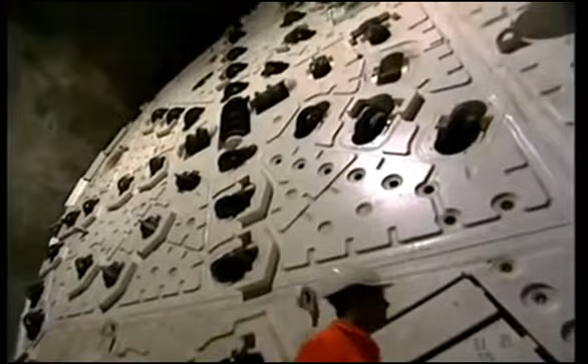It will take the largest drilling machines on this planet, each more than 3 stories high and longer than 4 football fields, drilling 24 hours a day for 6 years to get the job done. The project is incredibly dangerous and outrageously expensive. The price tag, $7 billion.

Can it be done? Or will unforeseen problems bankrupt the project before it's finished? Will engineers be able to avoid the horrible fate of so many other tunnels? Fire, disaster, and death.

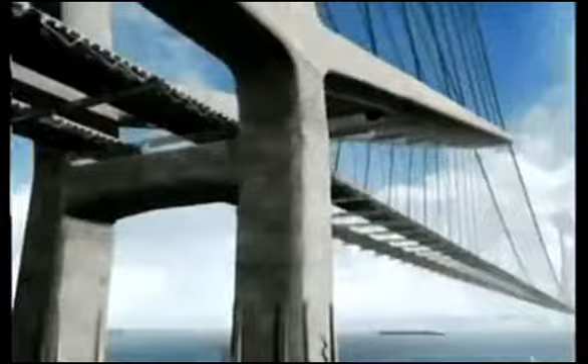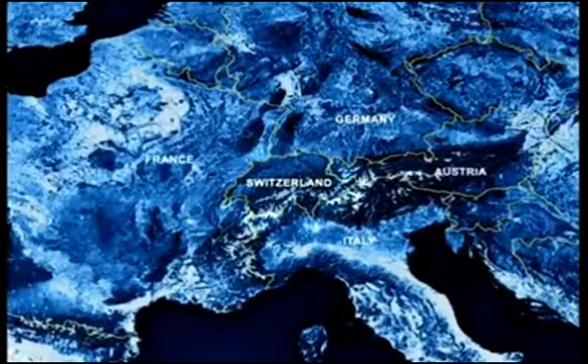To the outside world, Switzerland is a picture postcard. But the reality is not so pretty. Because of Switzerland's central location, each year 14 million trucks and cars coming from every corner of Europe pass through Switzerland on their way elsewhere. The sheer volume is fast turning this country into the biggest traffic jam in the world.

An obvious solution: put more freight and passengers onto trains to reduce the number of trucks and cars on the road. But it isn't that simple. The antiquated railway system is already jammed to capacity.

In 1998, Swiss voters decided that something had to be done. So they voted to authorize a whopping $21 billion for a mammoth project: a high-speed rail network to be built under the Alps, connecting Switzerland to the major cities of Europe.

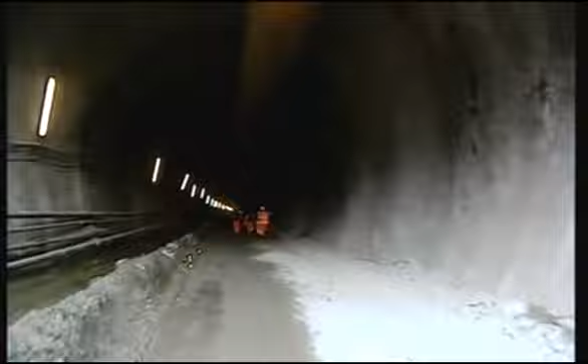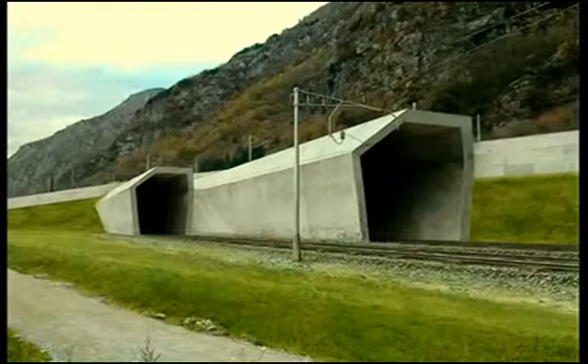The scale of the proposed project was staggering. It would require 2 separate tunnels, each one far longer than any mountain tunnel ever built. The shorter of the tunnels, named Lötschberg, would run for 21 miles under the mountains in southwest Switzerland. 50 miles to the east, an even longer tunnel would run 35 miles through the Alps. Since it would run directly under a mountain range named Gotthard, it would be called the Gotthard Tunnel.

3 times longer than any other mountain tunnel in the world, the Gotthard Tunnel alone will cost $7 billion. Enough to have built the Golden Gate Bridge 17 times.

The tunnel's path will be straight and flat, right through the base of the mountain range. This route will let freight trains race through the mountain at 100 miles per hour, more than double their current speed. And passenger trains will go even faster, up to 155 miles per hour.

Swiss voters were sold on the benefits of the proposed project, but they were also worried. They insisted that designers come up with plans to minimize the project's potentially devastating environmental impact. So the contract approved by the voters put enormous pressure on the engineers and the contractors.

First, there was the guarantee. The engineers would need to certify that the tunnel would last at least 100 years. That meant that literally every material used in the tunnel would need to be subjected to the most rigorous testing in history. But that wasn't all.

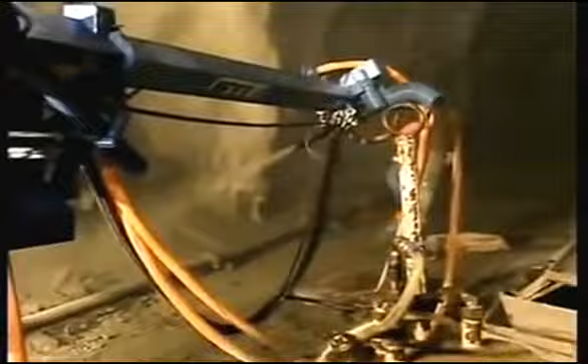The contract also called for the tunnel to be built fast. And if the builders made mistakes that put the project behind schedule or over budget, they would risk paying stiff financial penalties.

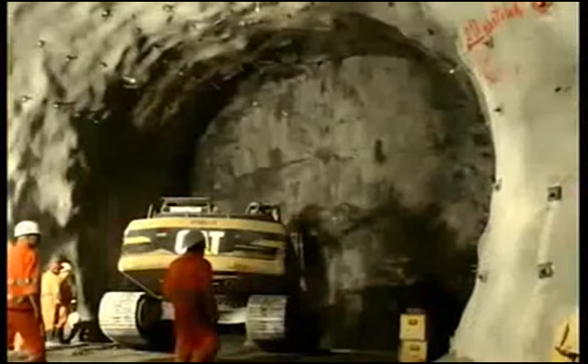We're not allowed to forget cost and time scheduling. Those are very risky things. And you just got to keep all of that in control. And everybody's just really aware the whole world is watching us, and we've got to get everything right.

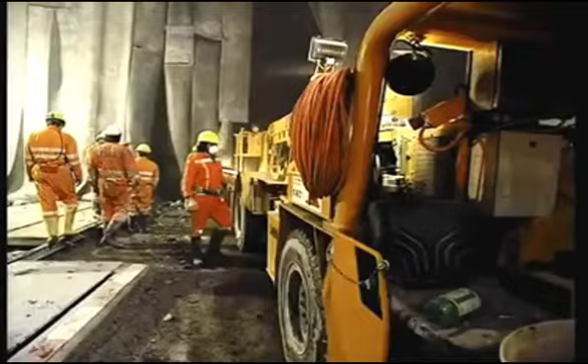Even without these added pressures, the Gotthard Tunnel project would still seem like an impossible task, just from the scale of the work itself. The miners will have to dig 24 million tons of rock out of the Alps, an amount that would fill over 16 football stadiums.

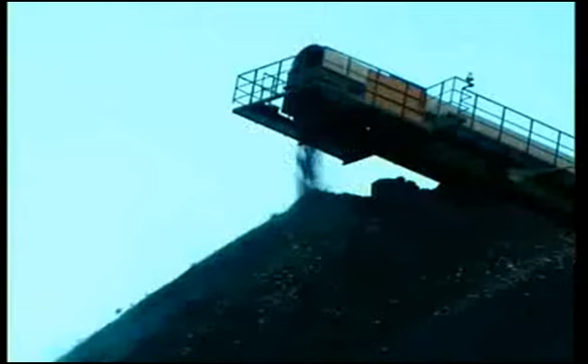Working conditions are extreme. Because the tunnel lies so deep underground, temperatures inside can reach 115 degrees. The miners work in near darkness and breathe thin, dusty air. Every day, they put their lives on the line.

The biggest danger is a lack of oxygen. In case of emergency, fire, explosion, the first thing that goes is the oxygen to breathe, because we're underground. We've got dumpers, we've got excavation machinery that move back and forwards. They're just moving around all the time.

It's dark. Drivers don't see people walking around behind. If they reverse out, somebody could get hit by machinery.

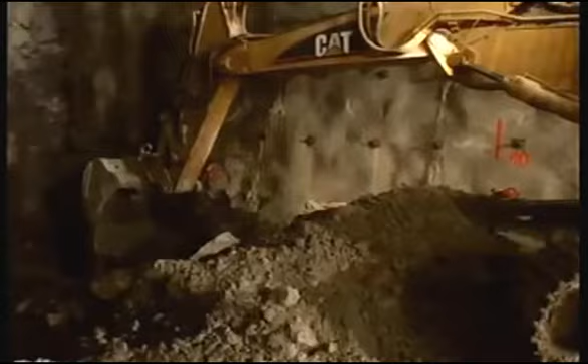And the dangers don't stop there. Tunneling, after all, is a battle between man and the Earth itself. Cave-ins are a constant threat. To minimize the risk, geologists take samples deep inside the mountain before any drilling begins, to find out what kind of rock the drillers might encounter.

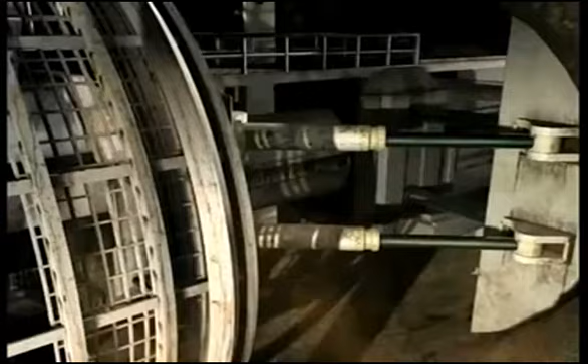A lot of sections we have rocks like this, real hard, nice granites, where we go through by a tunnel boring machine. The tunnel boring machine, or TBM, designed for the Gotthard Tunnel, can chew away at hard rock.

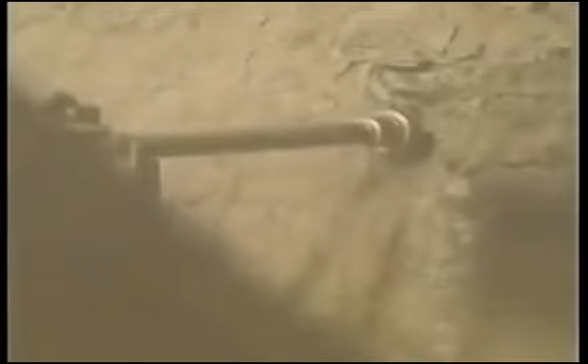But if the miners encounter soft or unstable areas, they have to use a different method. The rock must be drilled and then blasted out.

And in areas where there are high-pressure water zones and crumbly rock, none of these methods can be used, and the danger increases exponentially.

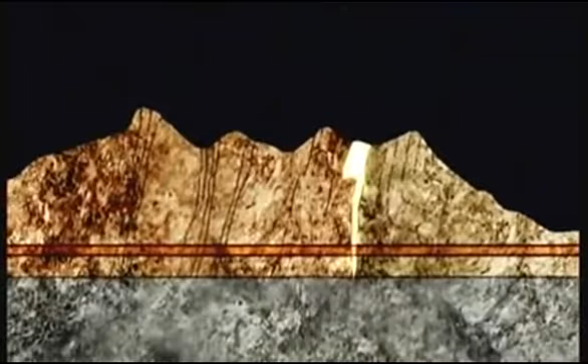In 1996, during the initial surveys, geologists discovered such an area sitting near the path of the proposed tunnel. The geological team taking core samples got hit by a sudden, powerful explosion of sand and water.

It's like you're in a submarine, 3,000 feet under sea level, and you drill outside into the sea. You hope that the water doesn't come into the submarine. So it's really life dangerous.

Fortunately, no one was killed in the accident. But the incident threatened to stop the project in its tracks. The engineers estimated that stabilizing the area would cost an extra $600 million.

That money simply wasn't in the budget. It took another half year of drilling deeper down before the geologists found a route that avoided the danger zone.

And then we found a totally different rock. We found a marble. So this is not a difficult rock, so we can go through by TBM.

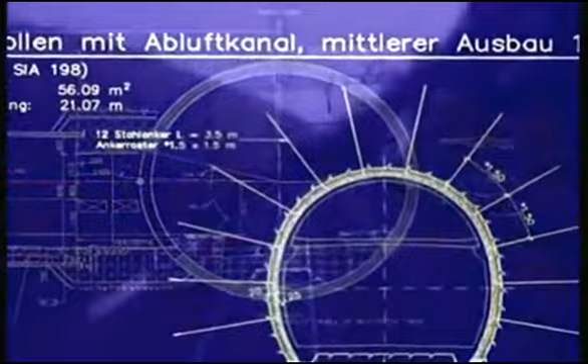Now that a safe path through the mountain had been determined, the design team could move on to their next big decision: what would the tunnels themselves look like? A single large tunnel with 2 sets of tracks inside would be the cheapest solution.

But this design had a fatal flaw. If a train derailed inside the tunnel, it could hit an oncoming train or block the tunnel in both directions.

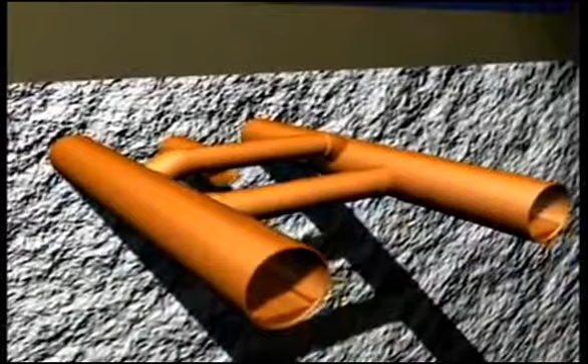A safer alternative would be the 3-tube system, like the one used in the Channel Tunnel between France and England. The Channel has 2 single tunnels, one for each direction, and a smaller central tunnel for emergencies.

That third tunnel proved a lifesaver on November 18, 1996. That evening, a train carrying several trucks entered the tunnel on the French side. The conductor was unaware that one of the trucks had somehow caught fire.

At the time, there were 6 trains in the tunnel, including 2 passenger trains. 12 miles inside, the conductor brought the burning train to a dead stop. He tried to get the passengers out, but the smoke was so thick they could barely see the exits.

Eventually, they were able to make their way to the safety of the central emergency tunnel. They were very lucky. The fire was so intense in the tunnel they had left, it melted part of the concrete lining.

2 people suffered serious smoke inhalation. But thanks to that central emergency tunnel, nobody died.

The lesson was clear: tunnels will always be dangerous places. But a good design can reduce the risks.

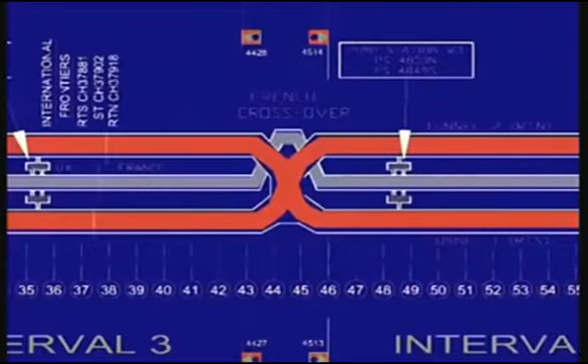The Swiss engineers carefully considered the pros and cons of each design. The single-tube system was clearly too dangerous. But the 3-tube system was far too expensive.

So they came up with something else: a double-tube design. Separate tunnels going north and south that would reduce the risk of a head-on collision.

To enhance safety, they added passageways every 1,000 feet. These would allow emergency crews to move between both tubes. 2 crossover points along the track would allow trains to switch from one tunnel to the other in an emergency.

The designers added another crucial feature: a series of small passageways connected to an escape route that crosses over to the other side. Each tube would have 2 of these emergency stations.

If a fire were ever detected, the computers in the command center would guide trains directly to the closest emergency station. Passengers would then evacuate the train and make their way to safety. A pair of massive ventilators at the portals would bring in fresh air and push out the smoke.

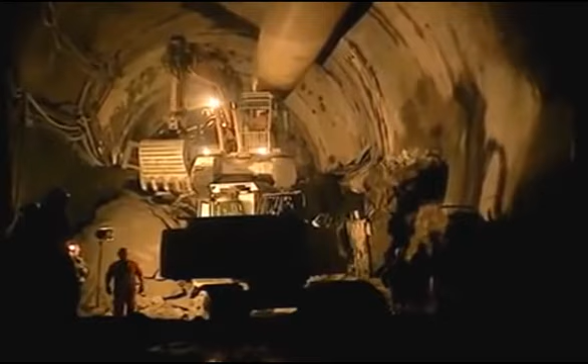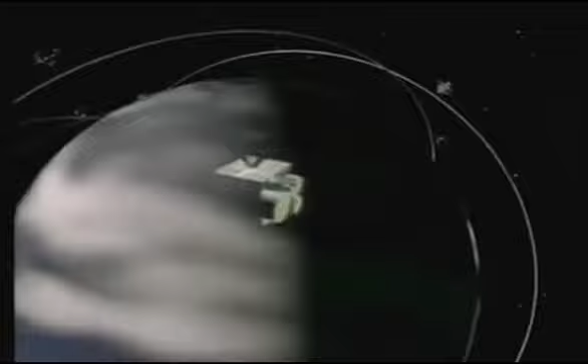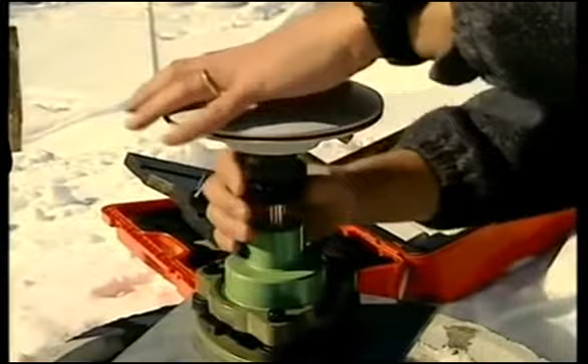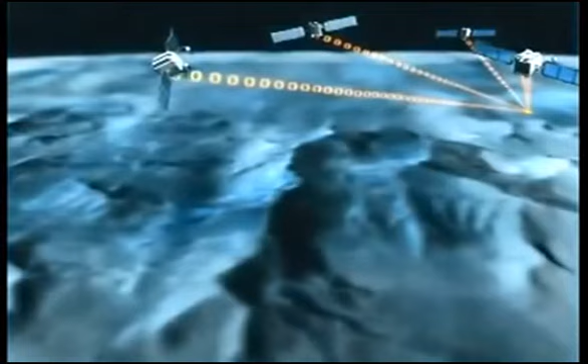So to make sure they had the most accurate mapping information, the engineers turned to the Global Positioning System, GPS. GPS receivers were placed at the north and south tunnel entrances, as well as 3 intermediate points along the proposed path of the tunnel. Next, 4 GPS satellites in geosynchronous orbit above the Earth beamed signals to the receivers, which gave them their precise coordinates: latitude, longitude, and altitude. Once the engineers had these coordinates, all they needed to do was connect the dots.

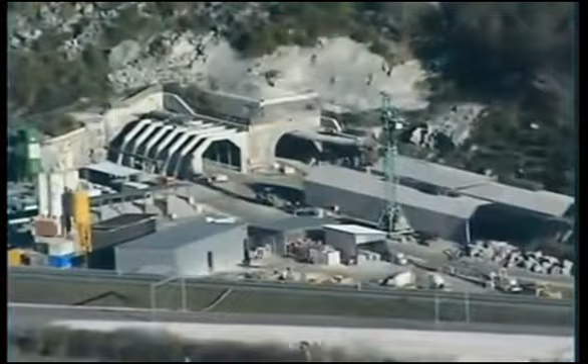The plans were complete. Now the real work could begin. Base camps were set up to launch the attack on the mountain. Because the job is so enormous, the engineers plan to enter the mountain from 5 distinct starting points.

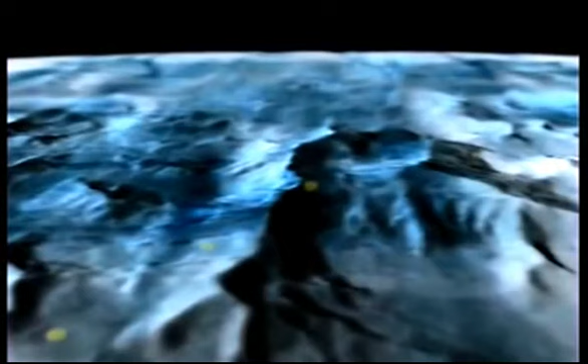It's a new system, a new way to excavate such a long tunnel. It would have taken us about 20 years to meet up because it's so long. With these measures of attacking with 3 intermediate attacks, we've speeded up the whole excavation phase by about 6 to 10 years.

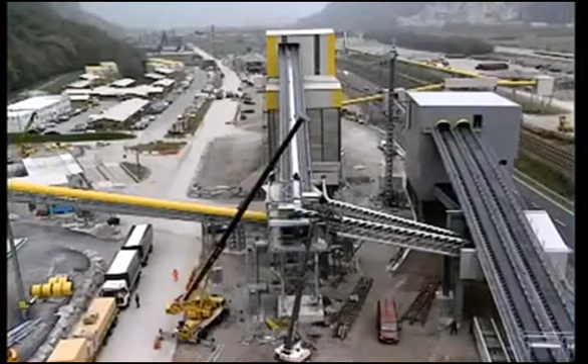Each starting point would have its own base camp, complete with concrete factory, water treatment center, living quarters for workers, cafeteria, even a mass transit system. The base camps would play a crucial role in keeping environmental damage to a minimum.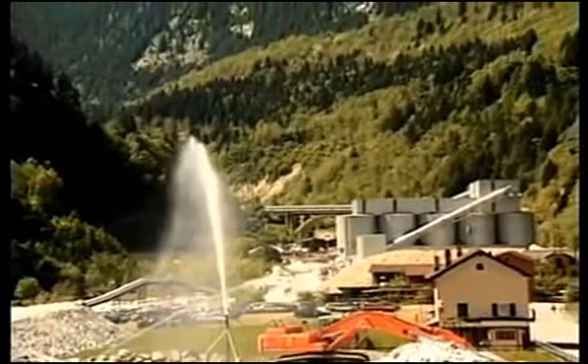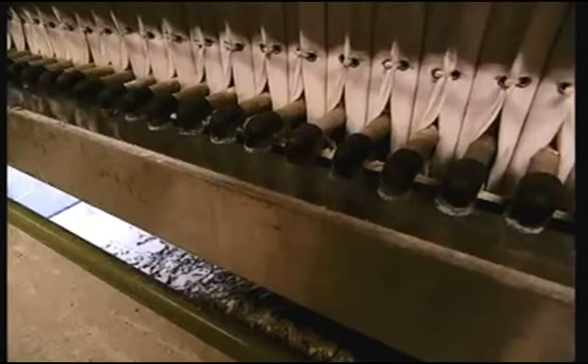A major concern was water. Drilling would contaminate huge quantities of pure mountain water that had been locked inside the mountain for millions of years. Water treatment plants at each base camp would filter out contaminants and then channel the water to nearby rivers.

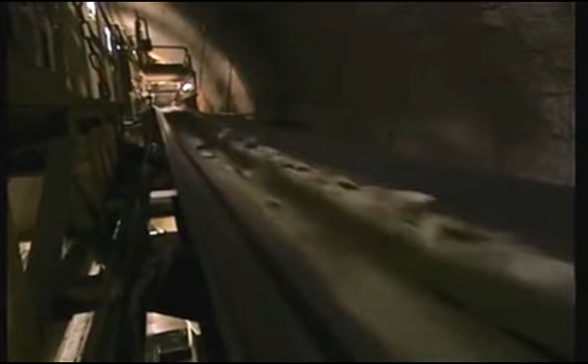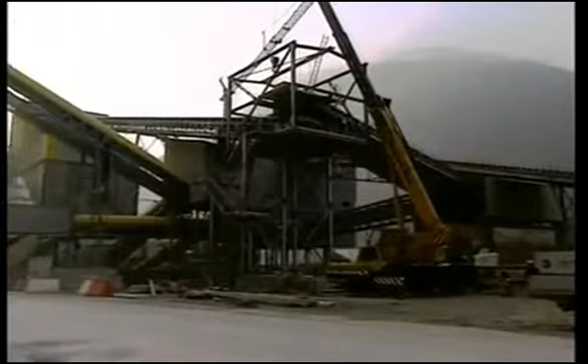But an even greater concern: rock debris. What could be done with the 24 million tons of rock the miners would carve out of the mountain? They came up with an ingenious plan: recycle it back into the project.

Concrete factories at each site would transform the rock to produce the 7.5 million tons of concrete needed to line the tunnel walls. That's enough concrete to pave an 8-lane highway 300 miles long.

Once the facilities were in place, project managers could start bringing in manpower. 1,800 workers were brought in from all over the world, among them the world's best technicians, explosive experts, and heavy machine operators. With the army in place, the full-scale attack on the mountain could begin.

Their first task: build access tunnels into the rock. These tunnels are needed to get the workers and equipment to the actual work site deep inside the mountain. The workers would enter the rock in trains, buses, even an elevator.

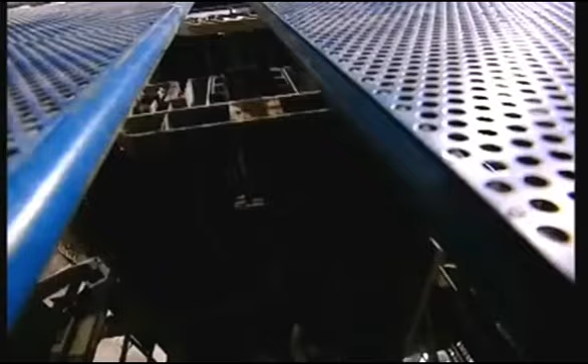The schedule required work to go on around the clock, 7 days a week, for 12 years: drilling, digging, blasting, just to make the deadline.

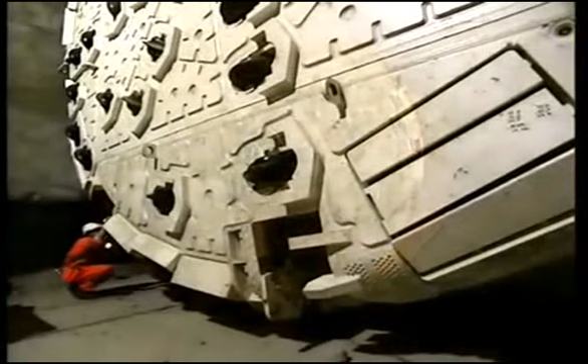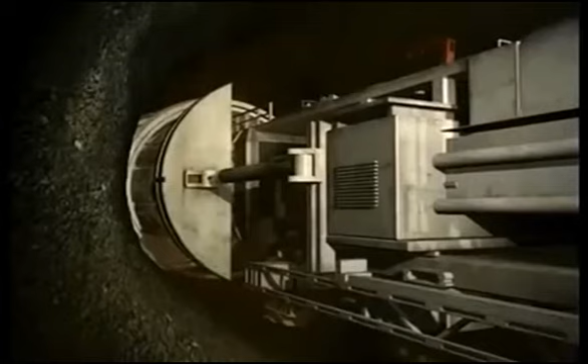But even at that pace, the project would be completely impossible without this. This is one of the biggest tunnel boring machines in the world. It's a drill with a drill bit 30 feet in diameter, designed to bore a tunnel through some of the hardest rock in the world. How big is it? 3 stories high, 4 football fields long. At full throttle, it can advance through 130 feet of solid rock in a day.

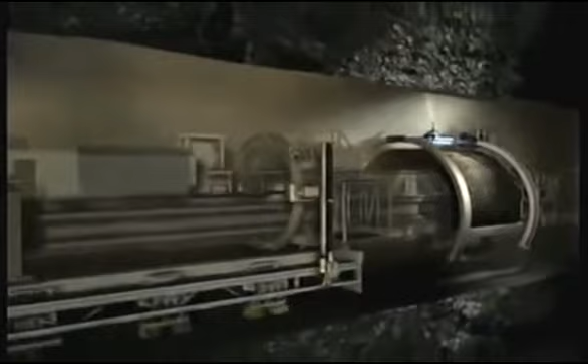But even this gargantuan machine had never been tested under these conditions. Could it withstand 6 years of constant grinding? To improve the odds, the engineers had to arm the machine with the best possible weaponry, custom made for the job.

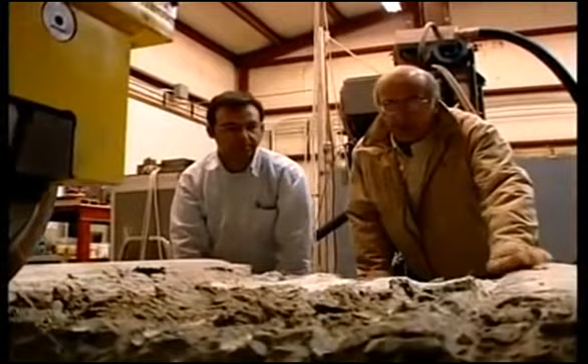The best custom drill bits for tunnel machines are designed here at the Colorado School of Mines. "Looks like you are getting some overbreak over here," where researchers test individual cutters, the steel alloy rollers that actually grind the rock face.

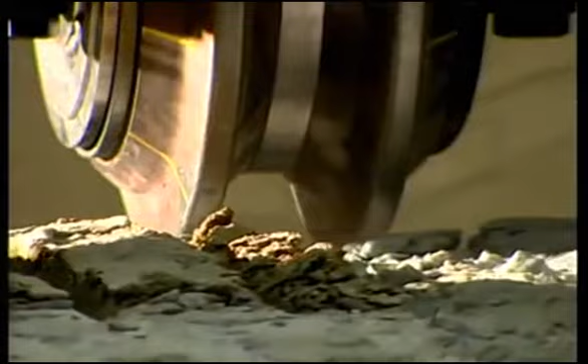To guarantee each cutter is best suited for its job, a rock sample from the tunnel site is placed on this machine. A cutter rolls over the rock again and again. The machine measures the force needed to cut through this rock.

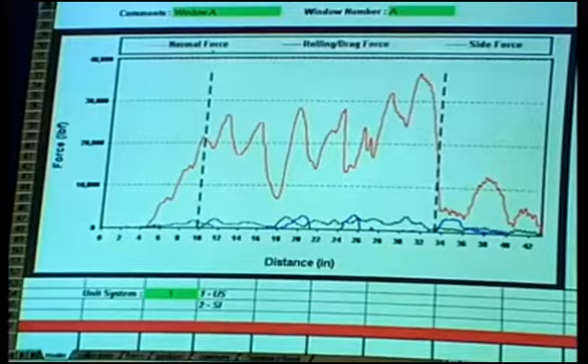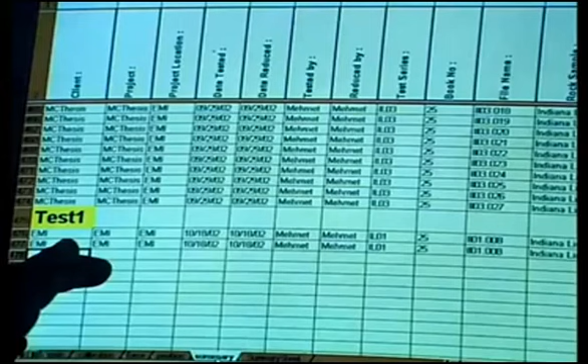The data we get from these tests allows us to design cutter heads that'll best match the tunnel boring machine to the rock being bored through, making the machine as productive and fast as it can be. The testing is critical. If the cutters are not made right, they could wear prematurely and slow the project down.

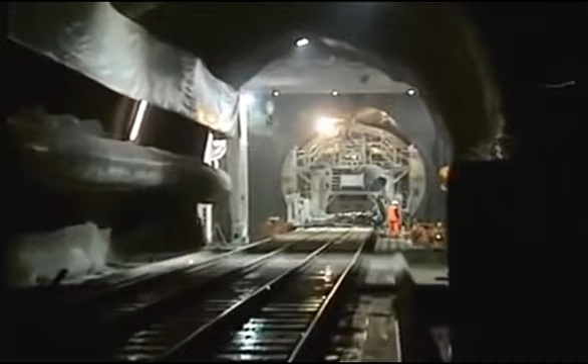58 of these cutters, each 17 inches in diameter, are mounted to the front of the boring machine's cutter head. The custom-designed cutter head was made in Germany and then shipped to the tunnel site in Switzerland. It then took 3 more months for technicians to attach the cutter head to the machine. Meanwhile, the clock kept ticking.

In November 2002, the cutters finally had a chance to test their chops. It was a critical moment. Engineers, miners, and politicians gathered in the depths of the Alps to see if the giant would really work. They waited.

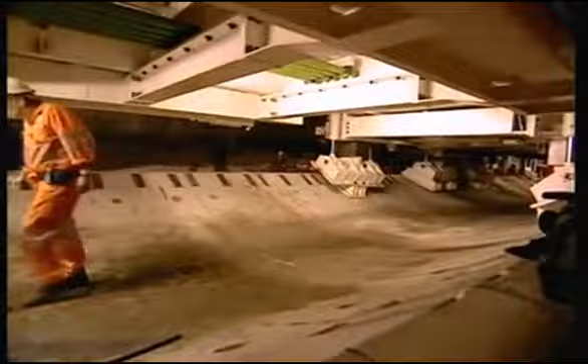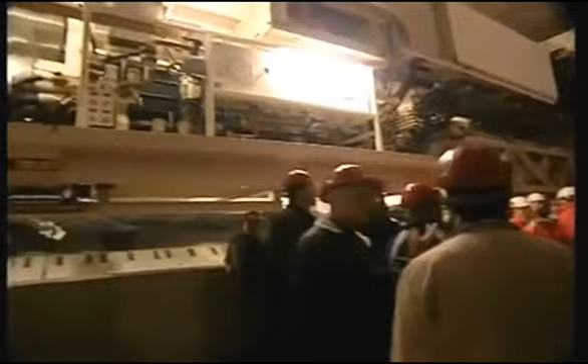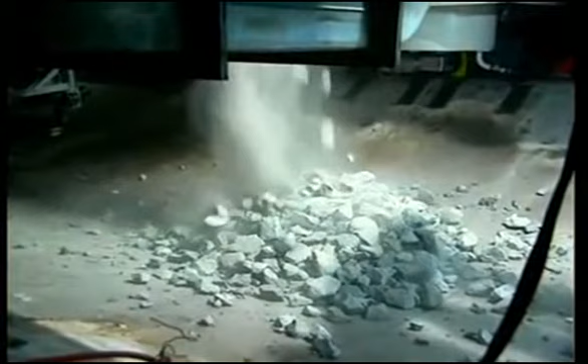Suddenly, the beast came alive. Its 3,500 kilowatt engine cranking out 4,700 horsepower. The massive cutter head turning, pulverizing the granite into tiny bits. Everyone breathed a gigantic sigh of relief.

Of course, the cutter head doesn't do the job alone. The Gotthard's tunnel boring machine is a complex marvel made up of 90,000 parts. Aimed precisely in the direction of the tunnel to be, a pair of gripper pads is pressed against the rock, locking the boring machine in place. The powerful hydraulic arms attached to the gripper pads push the cutter head forward, driving it into the rock.

The cutter head turns counterclockwise, crushing the rock into small chips with its 58 cutters. Each cutter can exert 26 tons of force. That's like 58 cars simultaneously hitting a rock wall at 26 miles per hour.

As the cutter head grinds, the small chips fall into a set of rotating buckets. The buckets deposit the chips onto a conveyor belt, which shuttles them out of the tunnel and onto the concrete processing plant.

But the tunnel boring machine does a lot more than grind the rock. Directly behind the cutter head, a set of robotic drills punches holes in the tunnel wall for bolt anchors to keep loose rock from falling in.

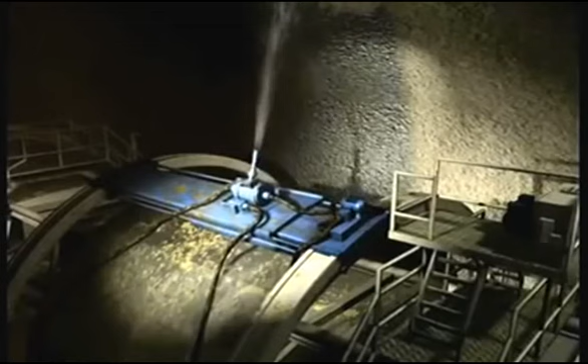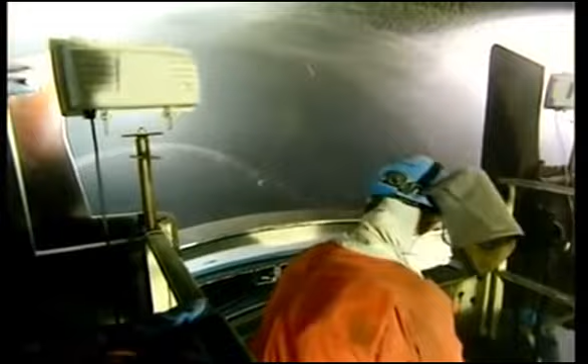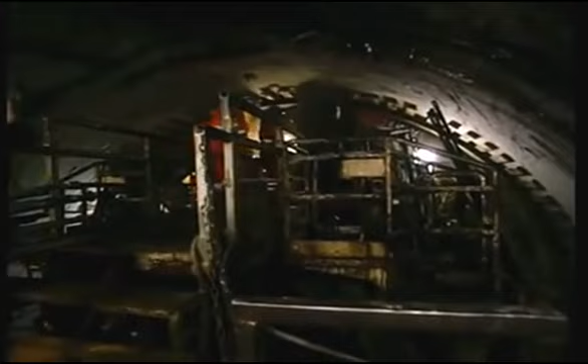65 yards behind the cutter head, a robotic arm sprays every square foot of new wall with a liquefied concrete called shotcrete. In a matter of seconds, the shotcrete dries, hardens, and binds to the tunnel walls. It provides a tough inner skin, which is added insurance against cave-ins. After every 7-foot advance, the workers must stop to reposition the grippers, and the process starts all over again.

The project is so massive, and the schedule so tight, the job requires not one, but 6 of these $21 million tunnel boring machines.

One pair bores north from the south entrance, while a second pair grinds south from a midway point. Then, a third pair of machines will start at the north entrance and drill south toward the midway point. If all goes as planned, the big machines will finish their part of the job in June 2009.

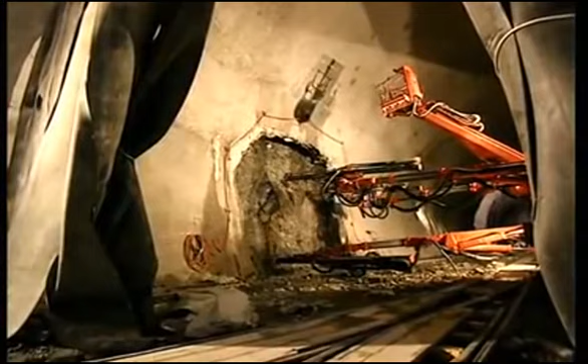But there are plenty of unknowns. And as powerful as the boring machines are, there are some places in the tunnel where they can't be used. That's because these machines can dig only straight and only through hard rock. But the Gotthard tunnel will pass through a few areas where the rock turns soft or is broken and unstable. The risk of a cave-in is simply too high in these spots to use the machine. So they have to be dug out the old-fashioned way, by drilling and blasting.

This machine is called the Rocket Boomer. It's a huge rock drill, capable of choreographing an explosion so potent it can remove a perfect circle of rock up to 19 feet thick.

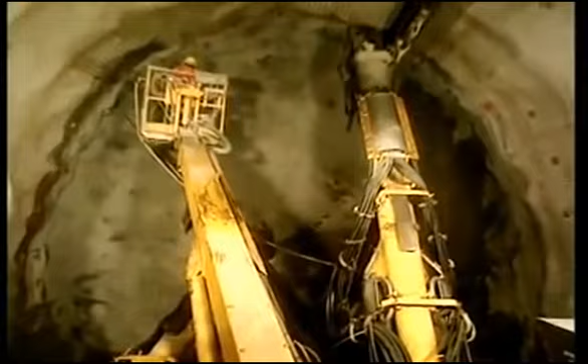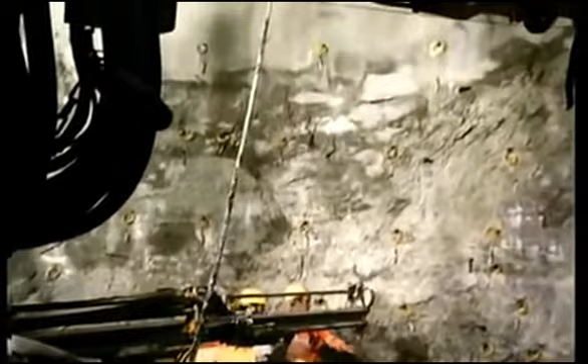First, a technician uses a laser beam to align the drill. Next, the Rocket Boomer's computer calculates the blast pattern that will deliver the most bang for the buck. Then the drilling begins, over 80 holes, up to 19 feet into the rock.

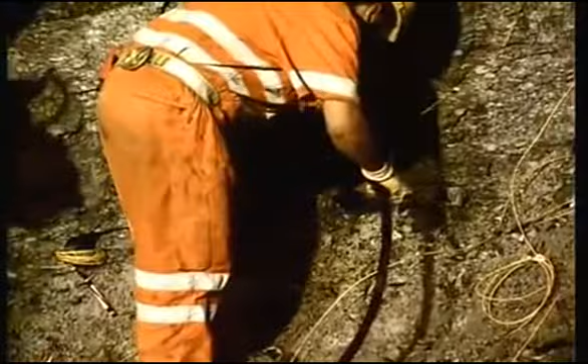Into these holes, a technician pumps precisely measured doses of 2 different chemicals. Each chemical on its own is completely harmless, but if the recipe is right, together they will become a volatile cocktail. To ignite the explosion, the technicians insert an electrical detonator into each hole. With all the leads linked together, a jolt of electricity sets off a massive blast.

Once the dust settles, the rubble is shoveled out. A single blast like this takes 8 hours to pull off. Their workday done, the blast team now makes way for the next shift, who will prepare the next blast.

Each day, on every front, the workers fight to advance into the rock as far as they can. The drilling team leads the way. They're backed up by a second unit, following closely on their heels, performing another crucial part of the job: building the concrete lining of the tunnel.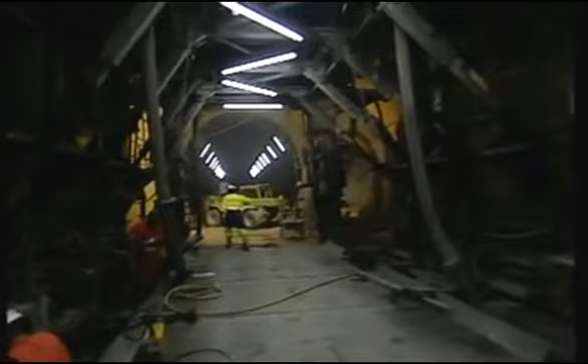50 miles west of the Gotthard, the drilling team working on the 21-mile-long Lötschberg Tunnel has almost completed the digging phase of the project. They've also already sprayed the tunnel walls with a layer of shotcrete, the liquefied concrete that stabilizes the rock as it dries. Now, the tunnel is almost ready for its final concrete lining. First, it must be carefully prepared.

At this stage, water is the enemy. Groundwater is always seeping through the rock and must be drained away. If not, water pressure can build up and literally push in the concrete lining of the tunnel.

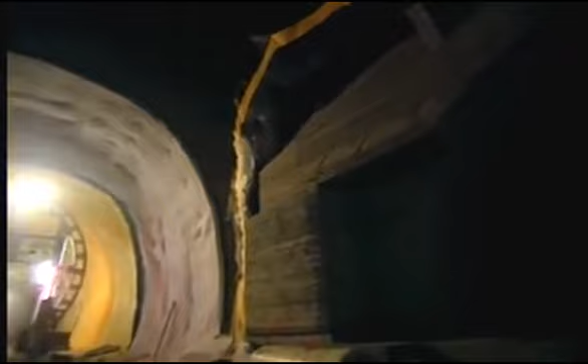To prevent this, the team applies an ingenious system of layering to the shotcrete wall. The first layer is a white plastic webbed mesh. The water trickles down the mesh into a drainage system at the bottom of the tunnel. A second layer of solid plastic sheeting seals off any remaining water behind it. This should make the inside of the tunnel waterproof.

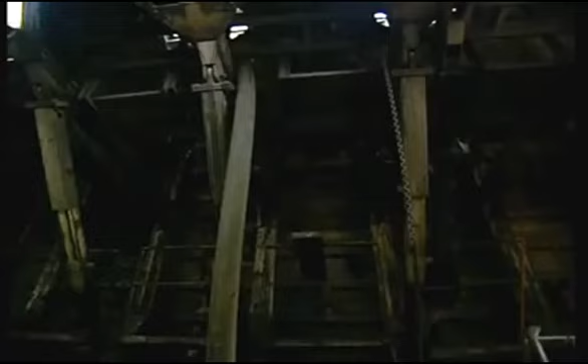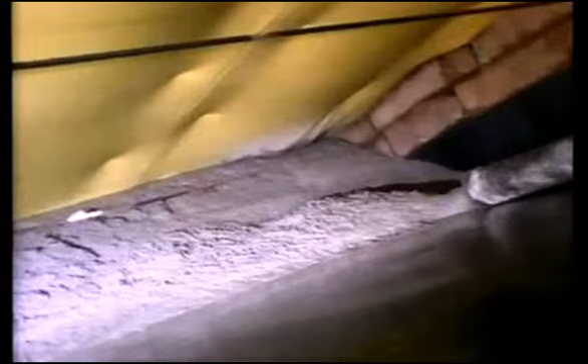Next, huge metal forms are put into place. And then, concrete is injected behind them. As the concrete dries, engineers keep water running over its surface so it won't crack. When the metal forms are removed, the smooth, final concrete lining is left behind.

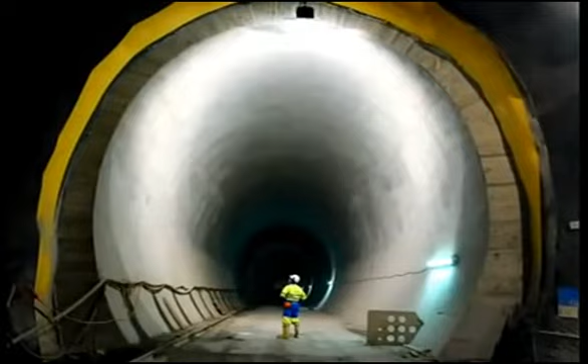Of course, the concrete used in these tunnels is no ordinary concrete. The designers have guaranteed that the tunnels will last at least a century. So everything that goes into the tunnel has been put through the most rigorous testing in the industry.

And that's done here, at the most advanced tunnel testing facility in the world, the Hagerbach Test Tunnel, 40 miles northeast of the Gotthard. The Hagerbach test site is a labyrinth of tunnels crisscrossing and stretching 2.5 miles into the mountain. Here, engineers must test and approve everything used inside the Swiss Alp Tunnel project.

In this laboratory, engineers subject concrete blocks to extreme pressure. The concrete lining has to hold up under the mountain's weight as the rock settles. When the deformation and the force is too high in such a tunnel, then you have some cracks in the lining, or the worst case is that the lining can break down.

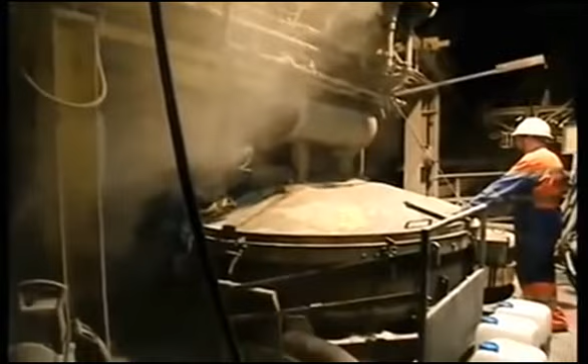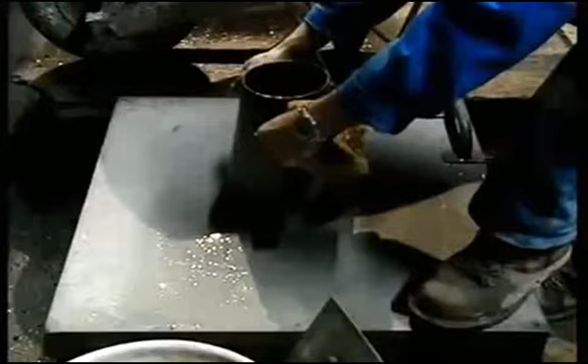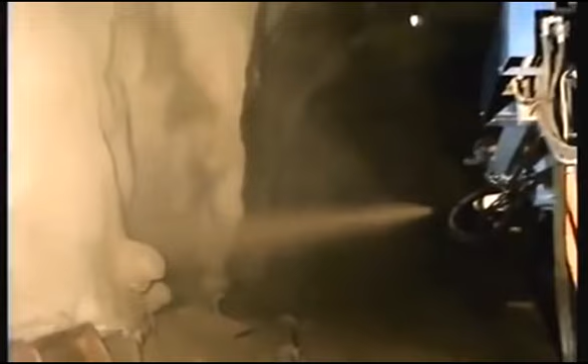Here, engineers are fine-tuning a shotcrete recipe, a mix of sand, gravel, water, and cement that is sprayed onto the tunnel's bare rock walls. The precise ratio of ingredients is crucial. Too little water, the shotcrete will be too thick to spray. Too much water, it will be too weak. Shotcrete also must be able to withstand extreme hot and cold temperatures.

In this area, engineers are testing explosives. Different types of rock need different formulas. Because the Gotthard Tunnel has extremely hard rock, they need an explosive with a lot of kick.

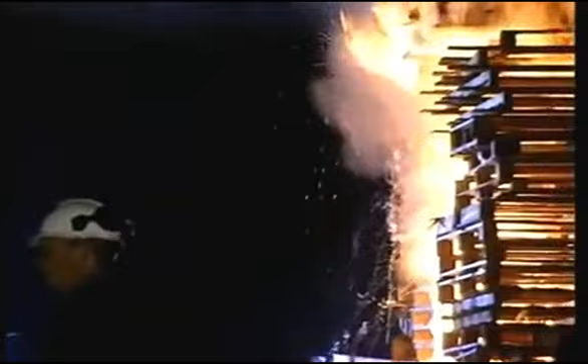These tunnels are also used to test people, to prepare them for disaster. Fire is one of the biggest dangers in a tunnel. Using wooden crates and gasoline, the engineers simulate a common tunnel accident scenario: a truck on fire. In just a few minutes, the fire is a raging inferno. In a fire, a tunnel acts just like an oven.

Temperatures can exceed 2,000 degrees Fahrenheit. Hot enough to vaporize human flesh. Even concrete. So firefighters have to be trained to move fast, to knock down any blaze.

Tunnels are also dangerous because they're cut off from air and light. Emergency crews can find their access blocked. The longer a tunnel, the longer it could take to get out if disaster should strike. And that happens more frequently than most people realize.

March 24th, 1999 started out like any other day. At 10:45 a.m., cars and trucks were speeding into the Mont Blanc tunnel between France and Italy, unaware of what was about to engulf them.

About 4 miles into the tunnel on the French side, a truck driver noticed smoke pouring from the back of his rig. He pulled over, but within seconds, his truck was completely consumed in flames.

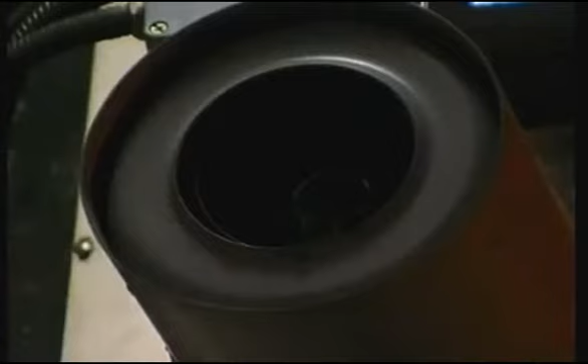First, they added 76 high-powered fans to blow out smoke and bring in fresh air. They set up fire stations inside the tunnel so crews can get to the fire quicker. Now, heat sensors at each entrance scan all trucks for overheated engines. 120 cameras linked to command control centers monitor traffic around the clock.

The number of emergency shelters was doubled. There are now 37, placed every 1,000 feet, running the full length of the Mont Blanc tunnel. Every shelter has a direct phone line to the central control room. And the engineers added something new, a way out of the tunnel. Inside each shelter, a stairway leads to a passageway below the main tunnel. In a disaster, emergency crews would be waiting there to take the drivers out.

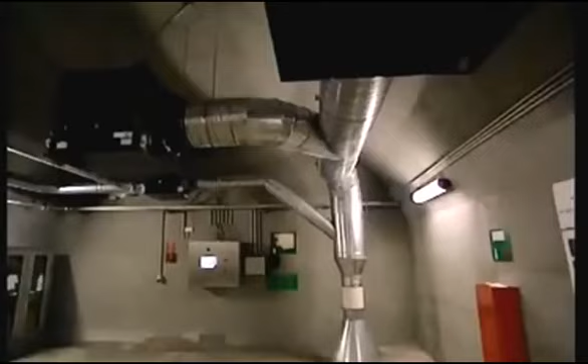The redesigned Mont Blanc tunnel is considered one of the safest in the world. But even with all the new features, there will always be a risk. No tunnel is 100% safe. Fires occur in tunnels simply because there is flammable material and sources of ignition. And you will never eliminate those completely.

The risk of a fire haunts the designers of the new Gotthard tunnel. Some freight traveling through it will be lethal. Volatile fuels and chemicals that could catch on fire, or even worse, explode.

The year is 2015. The new high-speed rail through the Gotthard tunnel is a huge success. Just as the designers had predicted, the roads now run free of traffic jams. But today, things could change.

A small fire has just erupted on a freight train also carrying passengers. No one on board sees the fire. And the train is carrying a dangerous cargo of highly flammable fuel. 12 miles inside the tunnel, a passenger suddenly notices the smoke and alerts the conductor.

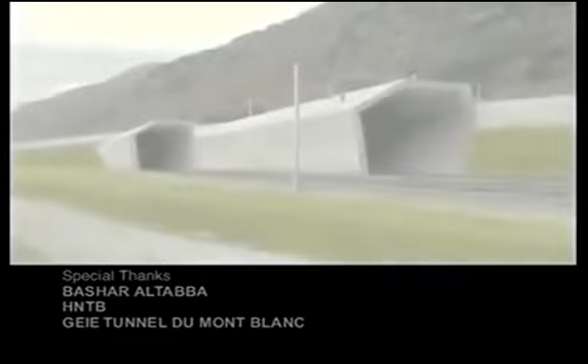And if the engineers get it right, the new Gotthard and its sister tunnel, the Lötschberg, may become models for a new generation of high-speed rail tunnels, showing other nations how to transcend the highest barriers that nature has created, from the Rockies to the Himalayas.